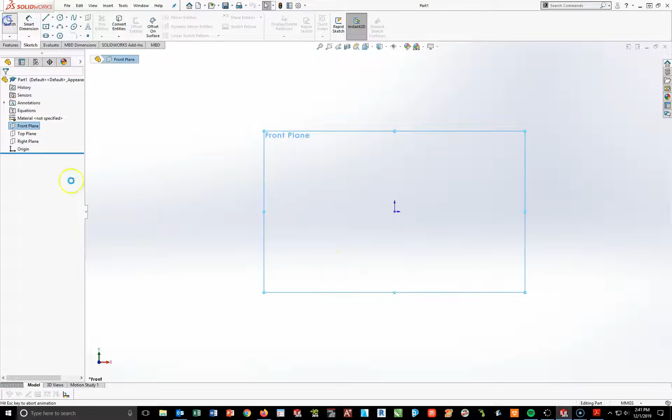So turning on my front plane and turning on my sketch tools, I'm simply going to turn on my line tool and create a U shape. Starting at the origin, I'll move out to my right, move straight up, move straight in, down, over, up, over, and down.

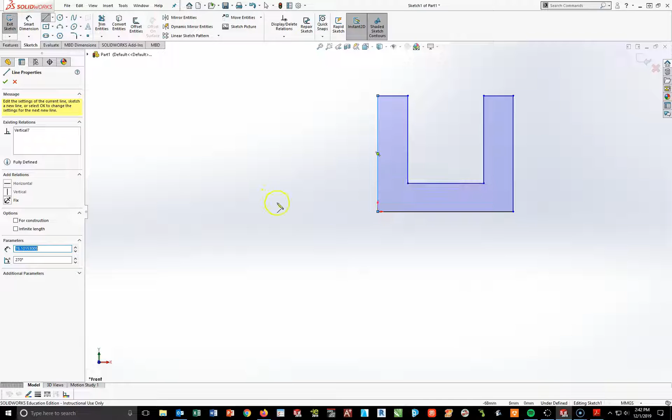Now, at this point, I'm done with my line tool, so I'll hit escape and hit my F key to center the part up. Now I see that it's in blue, so that means I need to look at my drawing to figure out the dimensions I need.

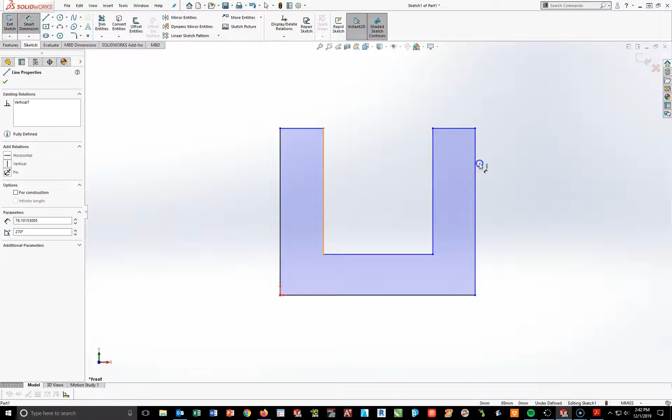So it looks like I need to make this thing 100 wide, a 60 gap, and each one of these sides is 20. So going back over, I'm going to turn this on from left to right at 100, make this distance right here 20, and the distance between these two sides here will be 60.

Now that takes care of the width part. Now I need to think about the height. Going back to this, I see the thickness down here is 20, and the overall height of this is 100.

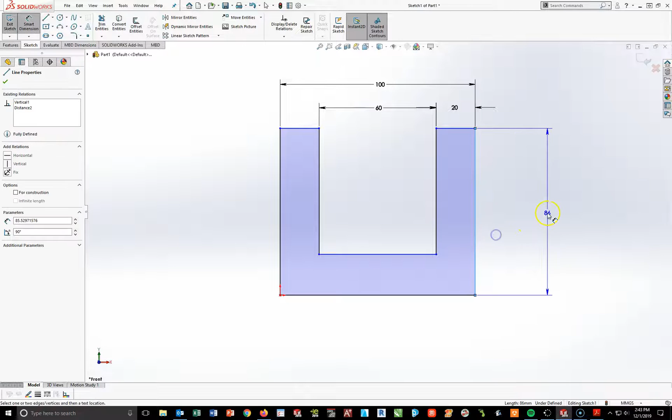So I'm going to go ahead and click on the side. I get the side as 100, and I'm going to get this distance down here as 20.

Now, as you can see, most of it's black, but this side right here, I see a blue line. And the reason that's happening, and hopefully you would see that, is that this line over here is not the same length as this one over here.

Well, I'm going to use my relationship tool, or my control key, to click on the left-hand side and click on this right-hand side and make these two lines equal. I will hit my check mark, and I now see that these are fully defined because they're all black, and it says fully defined here in the corner.

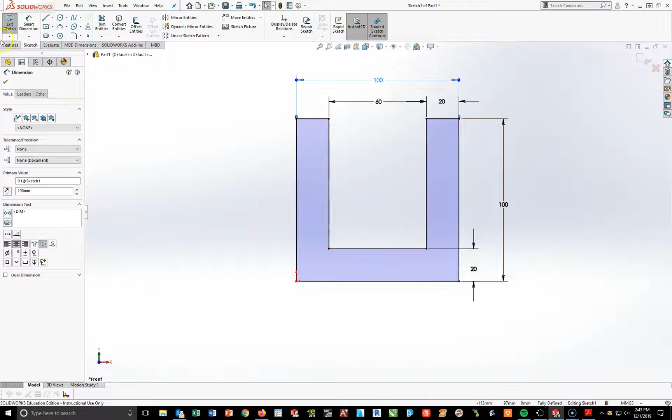So at this point, what I'm going to do is go to my feature toolbar, and we're going to do an extrusion.

Now for this one, that means I'm going to extrude in this direction. I basically have drawn back here, I'm extruding this way, and I'm going to extrude a total distance of 100. That is the depth I see right here.

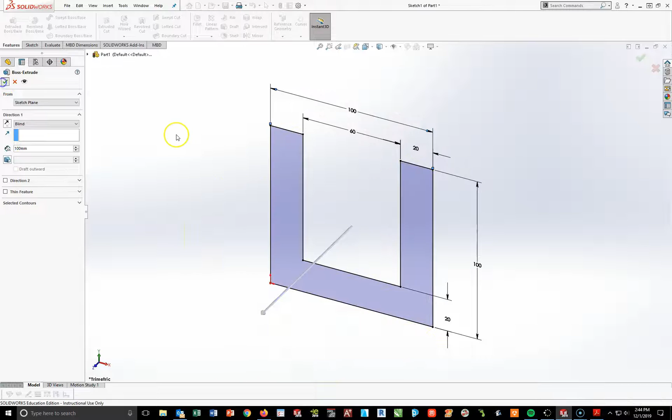So going back to SOLIDWORKS, where it says 10 millimeters, I'm going to change this to 100 and hit enter. Hit my check mark, hit my F key to center it up.

Now as you can see, the part is blue, and that should be a dead giveaway that there is no material attached to this part. So going back over here to my PDF file, I'm looking to see what the material is, and according to the PDF file, it is an AISI 1020 steel.

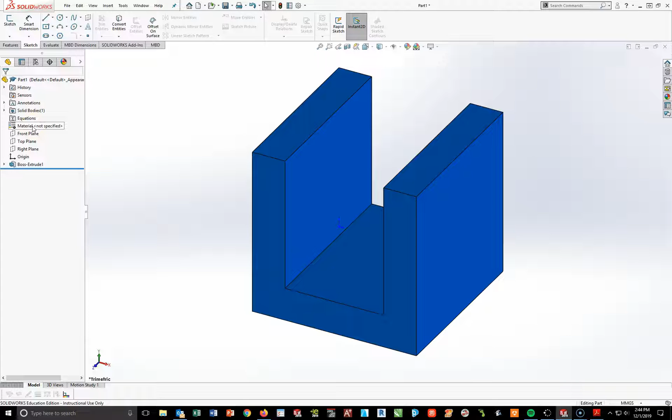Back at SOLIDWORKS, material not specified in the design tree, I right click and do an edit material. Under my steels, I'm looking for an AISI 1020. Don't worry about the cold roll, just go with a straight up AISI 1020. Hit apply and close.

Now going back to my part, I'm going to go ahead and add in these chamfers. I did not draw those in - that is a bad habit to do. If you try to draw them in, a lot of times these are where the mistakes occur. So what I'd rather do is keep this square and then use my feature chamfer tool to create these 10 by 45 chamfers.

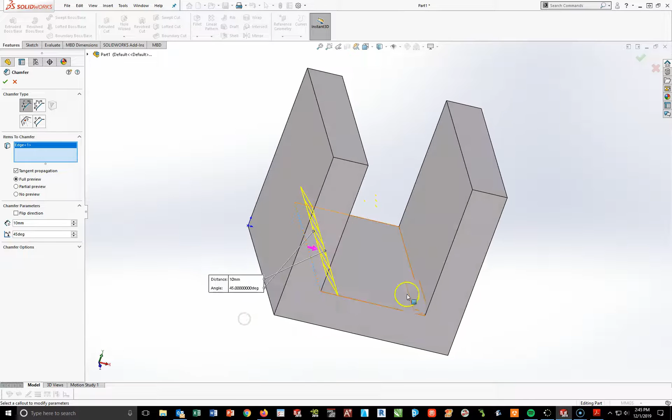Going back into SOLIDWORKS, I'm going to go to my features toolbar, and under the word fillet, drop that arrow down and go to chamfer. Now the default is 10 by 45, which is exactly what I need. So to make this work, I'm going to make sure I have my full preview on. I'm going to click on this line right here, hold my middle mouse button down and rotate, and click on this line right here. What I'm seeing is the preview of the two chamfers that are about to fill in. To make this work, I just go to the green check mark and left click.

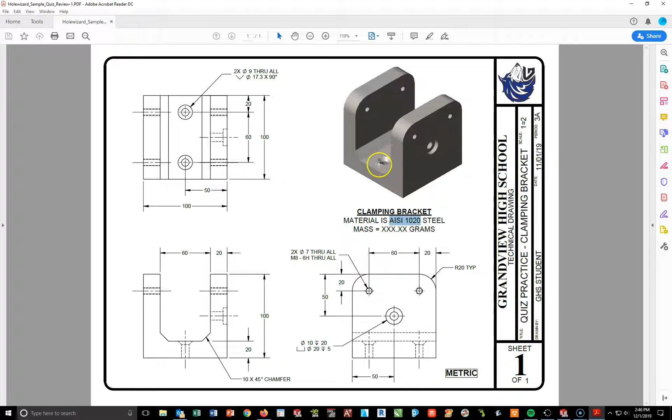Spacebar, isometric view - so there are my two chamfers. This is the most correct way and the best way of putting chamfers onto a part. So now looking back here, I see that I have these two pieces done. So now what I want to do is put in these two countersink screw holes.

The reason I know they're countersink is I see the sides are angled in, indicating a screw would fit in there. So now I'm going to have to use my hole wizard to put these in. Going back into SOLIDWORKS, under my feature toolbar, I'm going to go to my hole wizard. I left click and turn it on, and now I have my choices in my property management bar to set all this up. The three we primarily work with are Counterbore, Countersink, and tapped hole.

I would like to go to a countersink - that is this one right here. Now the big thing with doing this is the first thing I need to make sure is up to date is the standard. If you recall, we're drawing this part in metric. Right now mine's saying inch, which is not correct - I cannot cross my units. So I need to drop this down to an ANSI metric. It will be a flathead screw, I'm going to leave that alone.

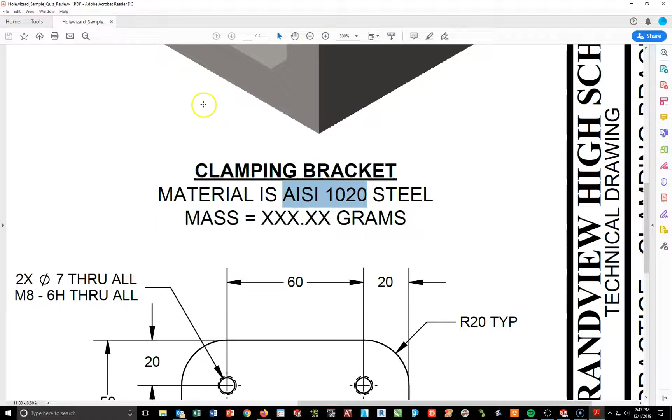But now I need to go back and look at this note over here. The note tells me I have two of these holes with a diameter of 9 that is going through all, with a diameter of 17.3 for the countersink at 90 degrees. So what I'm going to do is take these three numbers, the 9, the 17.3, and the 90, and plug them into my hole wizard using the custom properties.

Going back into SOLIDWORKS, I will go to Show Custom Sizing, click it on. I will now change this - the first box will be a 9, goes right in order. The second box will be a 17.3. The third box should be 90. Now the big thing is to make sure you have nothing else checked in the options area. The end condition should be through all, and the way I know that is because it says right here, through all. So now, knowing that's done, I need to place my circles or my holes.

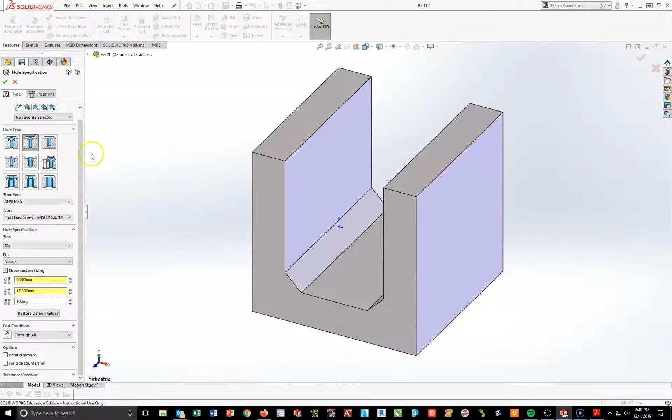So I go to the Positions tab here. I'm going to click on this surface - it says select the face for the hole. I'm going to select that face right there, do a spacebar and a normal to. I'm going to drop 2 of these approximately in the middle, left click on number 1, left click number 2. Now you'll notice the tool is still active, so to deactivate it, hit escape.

Now don't hit your green check mark - these two things are not defined. I can see that this is blue and so is this, and it also says down here under defined. That means I need to actually put these in position using my dimension tools.

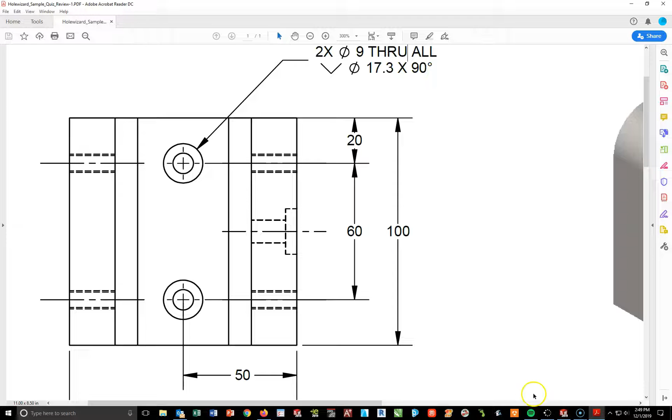So I'm going to look here. I see from the back edge to the center here will be 20. The center to center distance will be 60. It'll be 50 from this outside edge right here. So if I add those three numbers in, I should be able to get this to fully define.

Turning on my smart dimension, from this point here to the back edge will be 20. From the center of this upper hole to the center of the lower hole will be 60. And from this center to the far right, pulling down, will make this 50.

Now this one here, in this case, they're not defined yet for a specific reason. We need to add in a relationship between these two circles of vertical. So I did that by holding my control key. By doing that, it now says fully defined, and I notice the asterisks have both turned black.

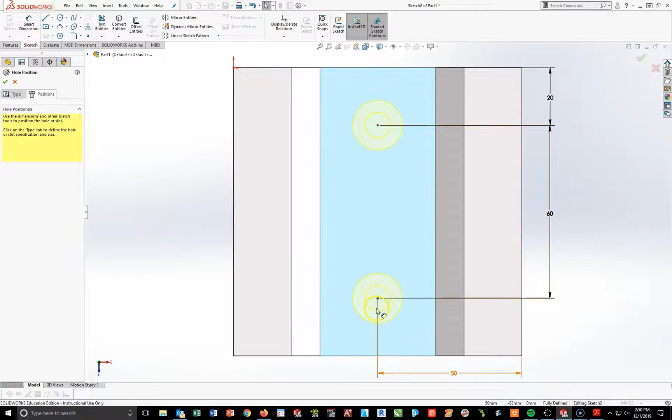As soon as I see this is fully defined in black, I hit my check mark, spacebar isometric, and I have my two holes where they're supposed to be.

So looking back over this view right here, I've completed these. I'm going to go ahead and enter this one right here. This is a counterbore. A counterbore has a flat bottom to it when it's sunk in.

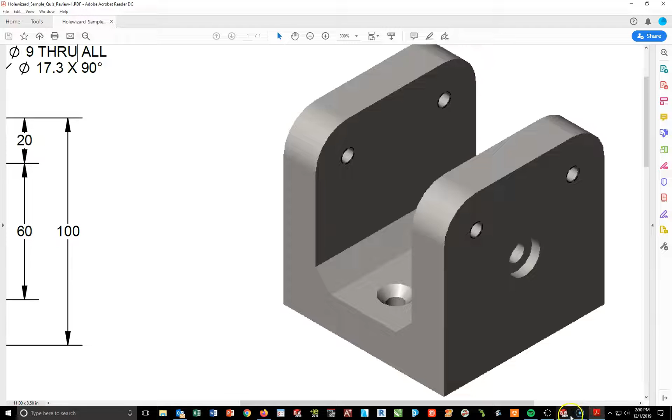So I'm going to go back and turn on my counterbore tool, hole wizard, and add this on this right-hand side. Now this only is on this side. How do I know that? Because I can look up here on this view and I see it only on this side.

Now looking at this again, it looks like the view I need to work with here is going to be the right side view. This is the information I need to complete this part.

So I'm going to go back into SOLIDWORKS, go back to features, and turn on my hole wizard again. Now we just did countersink. This time though, I'm going to use Counterbore.

I'm going to left click on that and it's going to ask me if I want to keep my custom sizing from before. In this case, no, I don't want to, because all the numbers are different. So I'm going to say reset the custom sizing values to their default values so that everything gets set back up.

Okay, now again, make sure it says ANSI metric under your standard. All right, the custom sizing - what I'm going to do here is go through and add in the numbers we saw in that note. That is these right here.

So I'm going to add in a 10, a 20, and a 5. Going back into SOLIDWORKS, I'm going to put in the first box a 10, the second box a 20, the third box will be 5.

Now the end condition, this is important. If I hit through all, you've got to think about that. If I put it on the side over here to the right and do a through all, it's going to not only punch through this wall, but also punch through this wall over here. So instead of through all, I'm going to drop this down to up to next. What it'll do is go to this edge over here and stop.

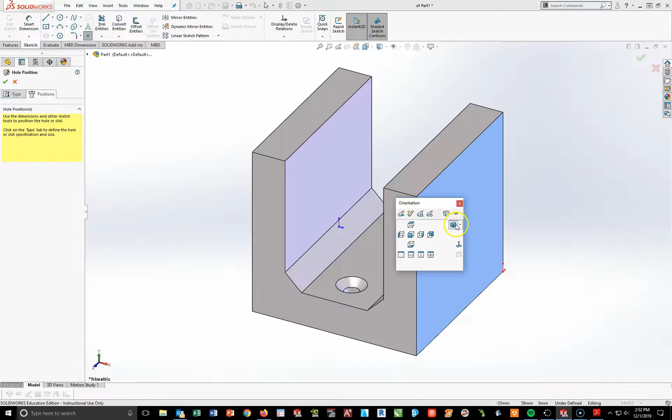Now I have everything defined, so the next step is to position the hole where I need it. I click on the Positions tab and it says select the face for the hole. I'm going to select this right side face, do a spacebar and a normal to, and kind of eyeball it to this upper middle and left click.

Now you'll notice it's still active. To deactivate, I must hit escape. Now in order to get this defined, because right now I see that as blue, I also see under defined in the corner. I need to position this hole using my dimension tool.

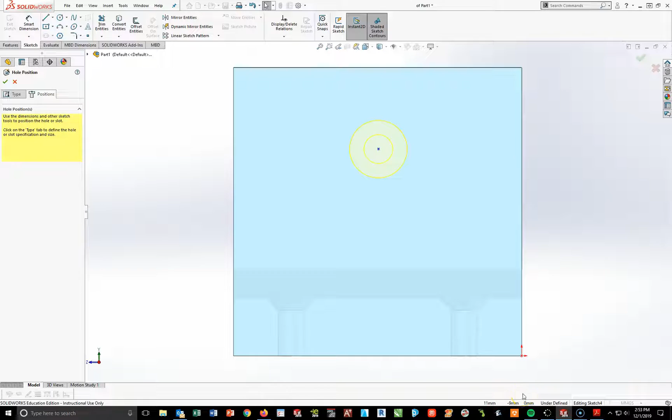So going back to the part, I'm looking, it looks like this is going to be dimension 50 in and 50 down. Going back to SOLIDWORKS, turning on my smart dimension from this top here will be 50. And from here to the side is going to be 50.

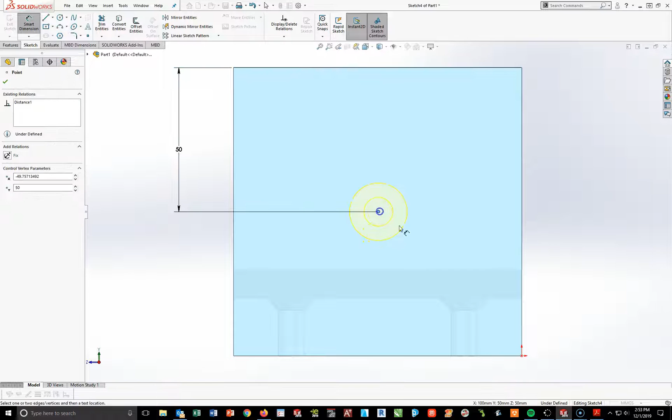Just like that, I notice this turns black and it says fully defined on the side. Once I see that, all I have to do is hit my check mark, spacebar, isometric, and there is your counterbore hole.

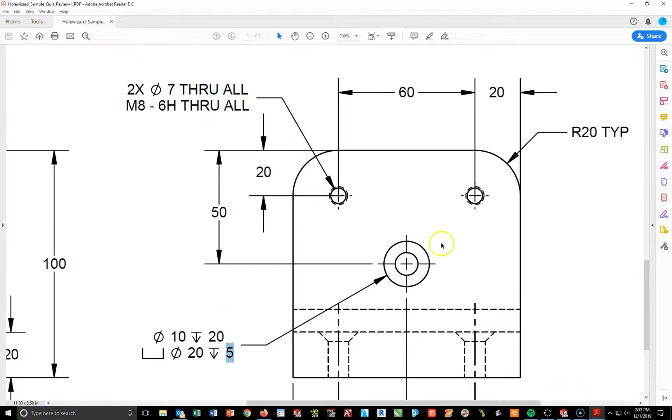Now let's go back and look at this part. One of the things I've just noticed is I forgot to round off my corners. You'll notice that it says the corners should be rounded off at an R20, and TYP means all the corners are the same. So I'm going to use my feature fillet tool.

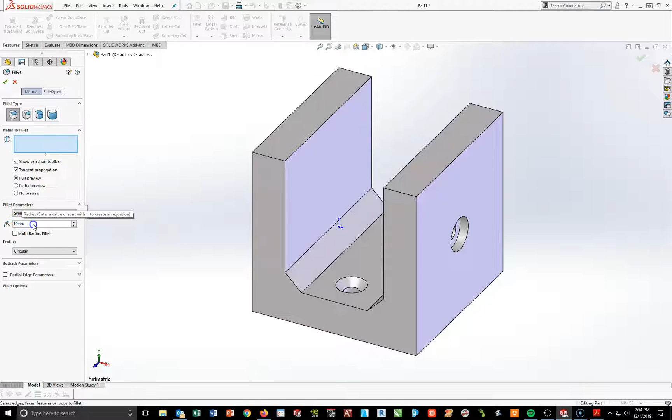Under my feature toolbar, I'm going to go up to my fillet tool and put in a radius of 20 millimeters. Now with a full preview showing, I'm going to click on each of these lines here to create the 20 millimeter curve. As soon as you see all 4 of those showing round it over, hit your check mark to finish that step.

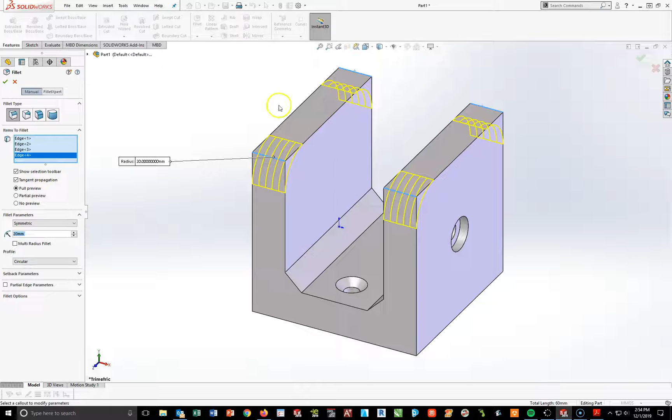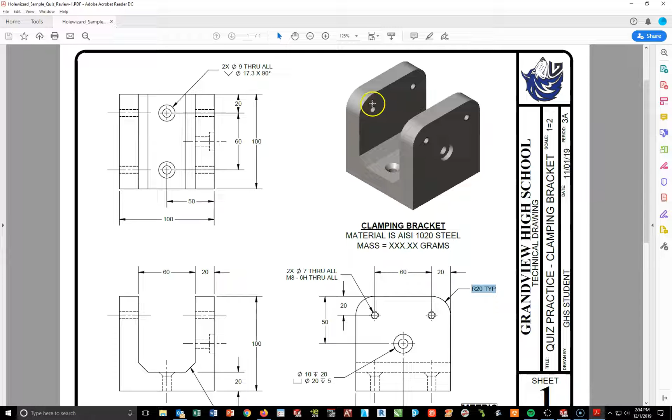So now, looking back at my part, I've got all of my stuff done here. I've got all these rounded over, I've got my counterbore and I've got my countersinks, and I've got my chamfers. The only thing missing are the screw holes going through the two sides.

So looking at this corner here, I'm going to focus on this note right here. What it tells me, I have two holes with a diameter 7 going all the way through, and the size of the hole is an M8-6H through all. So I'm going to use my hole wizard. In this case, what I'm looking at is these dashed lines going around the outside edge of the circle. That indicates a screw thread. However, we don't call it a screw thread when working with SOLIDWORKS, we call it a tap, or a tapped hole.

Okay, tapped thread hole. So I'm going to go here to SOLIDWORKS, go to my features toolbar, and we're going to go back to hole wizard. Now again, I've used Counterbore and I've used countersink. This time though, I want to get a screw thread in there, or what we call a tapped hole.

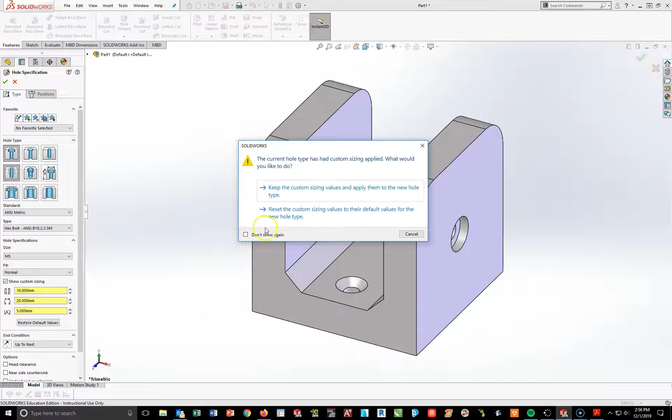Well, if you look at the first row and the first box in the second row, there is your straight tapped holes. If you left click on there, it's going to ask you if you want to reset your values. Since my values for this hole are different than my previous hole, I'm going to go ahead and say yes, reset the custom sizing. Now again, making sure I'm under ANSI metric.

I am, that's good. This will be just a straight tapped hole, so I'm going to go down here to tapped hole. I'm going to change this to an M8, and now this is one where it's a little bit off there, I'm just going to do an M8 by 1.0. Custom sizing will be 7.00, with condition being through all.

Okay, now again, under options, make sure all boxes are unchecked. In addition, this is very important, in order to see these dashed lines going around a circle, you must have this box checked under options: cosmetic thread is showing.

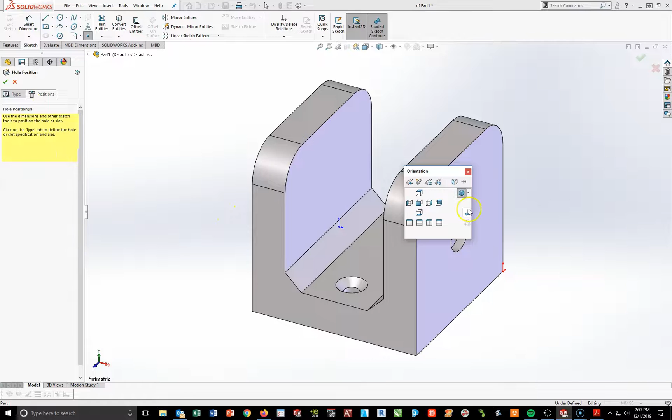Now with that done, everything's set up, I can go to my positions tab, click on this face, spacebar, normal to, and I'm going to place a hole over here and a hole over here. I'll hit escape to turn my tool off. Now again, neither one of these is defined and they're not in the correct place.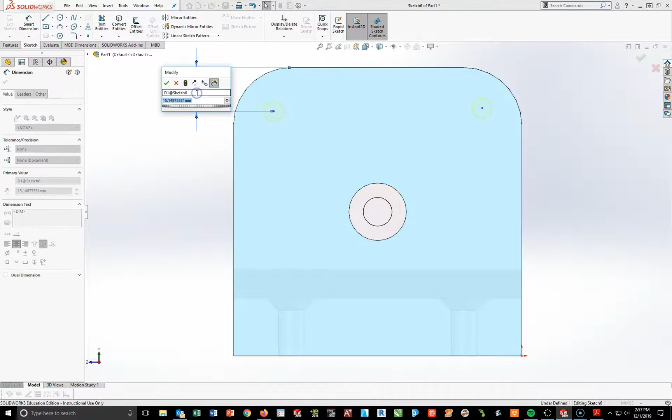We must dimension them to their proper spot. So going back to my drawing here, it looks like it's going to be 20 down, 60 in between, and 20 from this right edge here. In addition, they're going to be horizontal to each other. So turning on my smart dimension, from here to this part here is 20. From this left one to this right one will be 60. From this right one to this edge here will be 20.

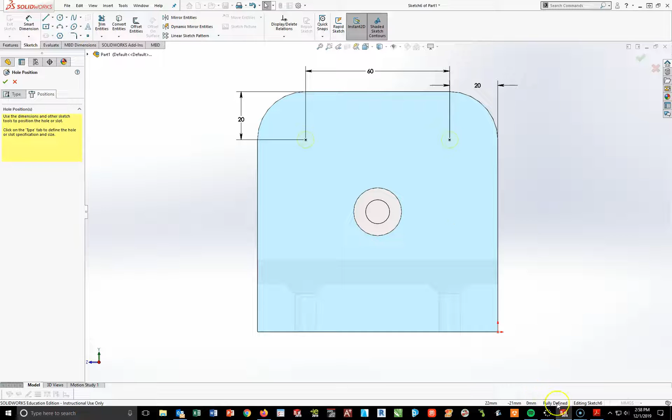And then the last thing is that they are both horizontal to each other. So with my control key, I will hit both centers and make them horizontal. I now see fully defined in my lower corner. So at this point, I can hit my check mark. I see the dashed lines indicating threads. Go to my isometric view, and my part is done.

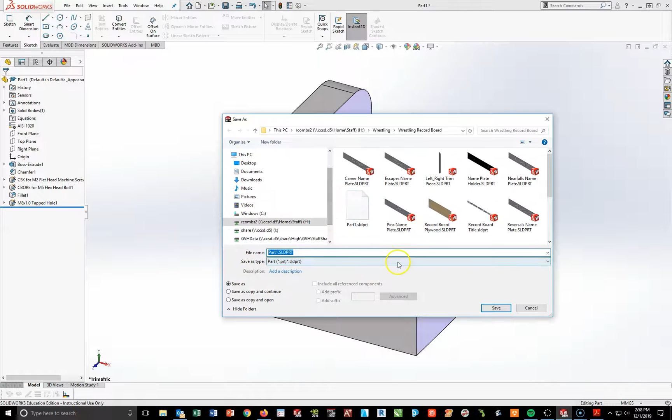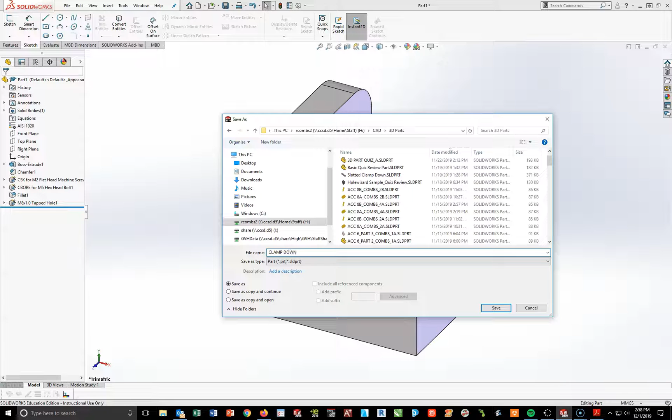So at this point, I'm just going to do a file save as. Go ahead, in this case, to your H drive, under your CAD folder, 3D parts folder, and call this—whatever we call this—clamp down, I believe is what I called this, if I remember correctly. Yeah, I'm just going to call this clamp down, caps lock, and underscore your last name. Okay, and save. All right.

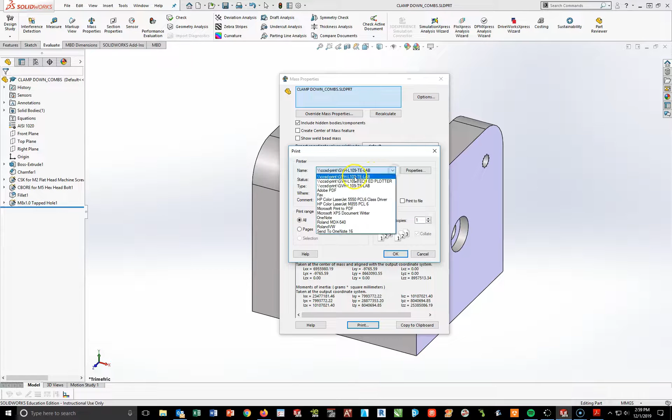At this point, I can go into my evaluate, I can look at my mass properties. I see my mass properties are 4,061.58 grams. So now go ahead and print that. Make sure you get it printed to the correct printer. In this case, it should be our L109TE lab, and say OK. Close out your mass properties.

So our last step then is to put this into a drawing. Okay, so again, I'm going to do a file new, and we're going to put this into a GHSA metric. I'm going to hit OK.

As the drawing opens up, I'm going to hit my F key to center it. And I'm going to come over here where I see the clamp down, go to the blue arrow, and start setting up my drawing.

Now, this is the same setup we've been doing since week number 4 in school, so we've been doing this for almost 14 weeks now. I'm going to start by going to the front view first, turn on my preview, and make sure my hidden lines are visible.

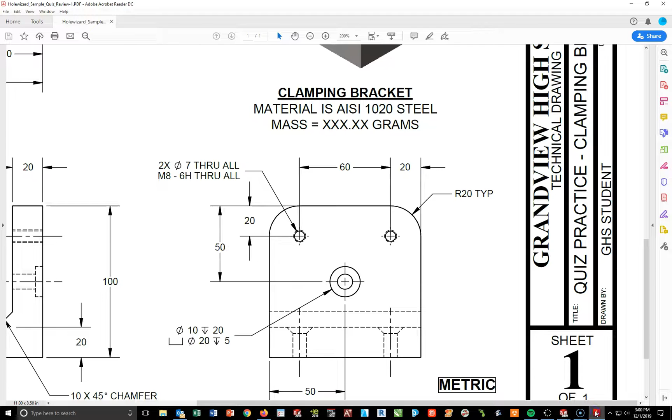The scale for this one, I believe, is supposed to be... let me go back to the part drawing. It's going to be 1 to 2. So going back to SOLIDWORKS, setting that up, this one here I should see 1 to 2, and I do.

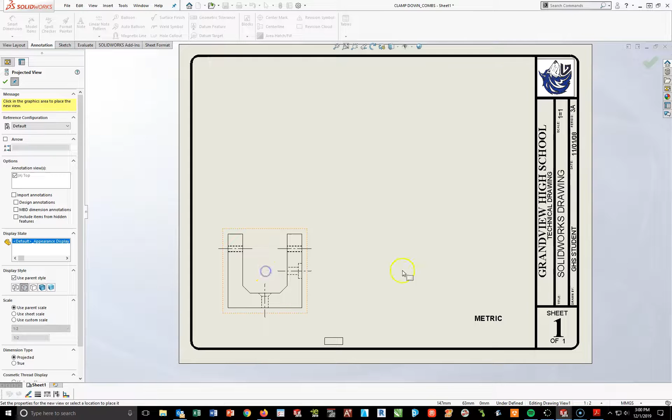At this point, all I'm going to do is come in here, starting in the left-hand corner, left click, pull to my right, left click, pull straight up, left click, pull a diagonal, left click. Okay, I'm going to highlight this box and get rid of it because I don't want it there.

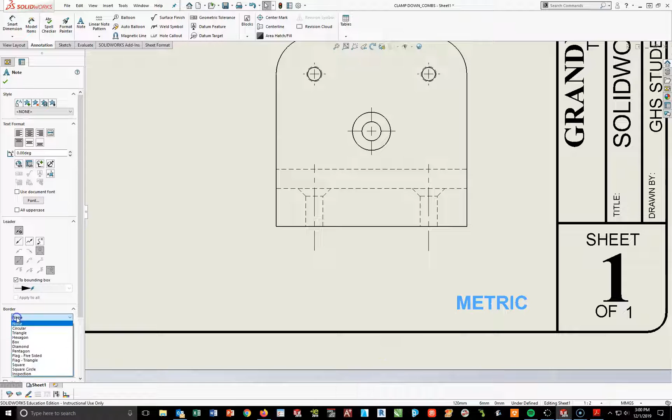I'm going to take the metric box and move it to this lower right corner, like so. I'm going to go ahead and add in the border over here to the left and make a box around it.

Now I'm going to take this upper one here, and the first thing I want to do is add some color. If you want to take it without the black lines, you're more than welcome to go this way. I want to really focus in and make sure I don't have any of these lines on this part, so I'm going to delete those.

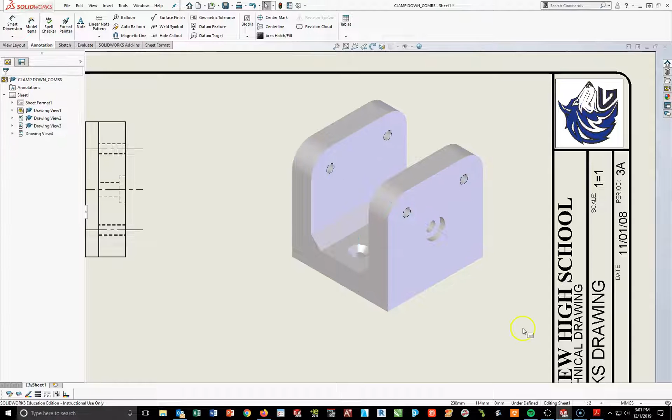I'm also going to go ahead and add in my note here. Now I'm going to use the trick on this one to save myself some time, so I'm going to go to my note tool and drop my note tool underneath.

I'm going to go over here to my PDF file, and highlight this title right here, Control Copy, come back into SOLIDWORKS, and with my cursor inside this box, do a Control V.

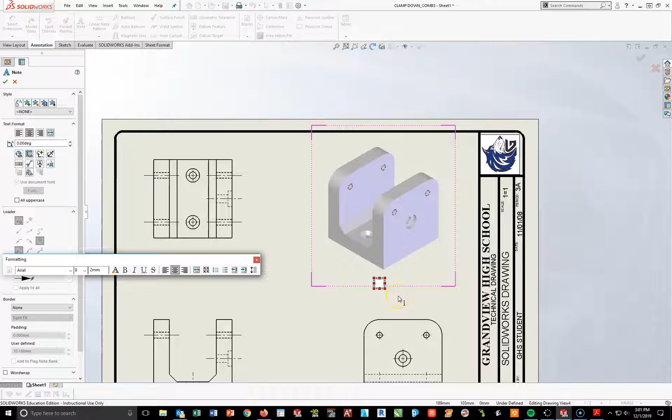In this case, though, I need to put in a number here. So I'm going to put in 4061.80 grams. Do not leave it as three X's like some of you have been doing—it's an automatic deduction in points for not telling me your mass.

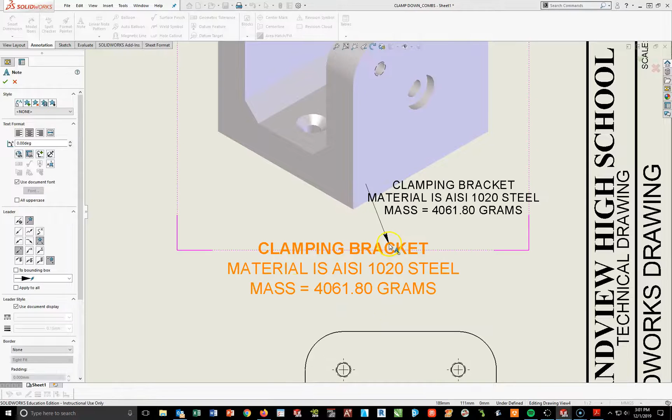As soon as you're done, click outside, hit escape, and make any adjustments you need to put this in relation to this part right here. Okay, that looks good—everything looks done to this point.

Now, since we're getting ready for a quiz, the next step I want to show you is how I can get my dimensions on this part as fast as possible. I am now going to go up to the word Model Items, left click on that, and I just got to quickly set some things up.

So I'm going to say the entire model and import items into all views. I'm also going to make sure that not only do I have my dimensions for drawing, I'm going to do the not marked—basically clicking on every single one of these boxes.

Nope, I don't want the profiles. Okay, like so—so I want 1, 2, 3, 4, 5, and 6 drawings, and I want the eliminate duplicates on.

At this point, all I'm going to do is left click on the green arrow, and what you're going to see is all the hole callouts and all the dimensions will suddenly pop on the screen. So there are all my numbers.

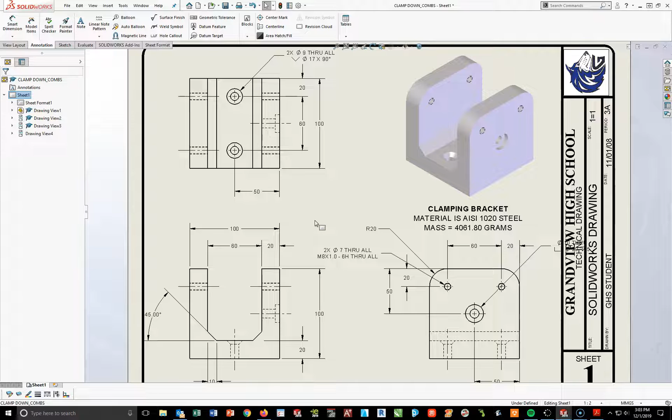Now, what's important with this is if you were to do all the two-dimensional sketching we did before extrusions and put your dimensions in the same spots as you saw in the drawing, they should have imported into the same spots. Now, looking at this, I got a couple issues.

I'm going to just make some adjustments, kind of come in here and tighten this up. This 100 was actually on the upper part here, so I'm going to turn my Smart Dimension on and add that onto here. Okay, the 20s are good.

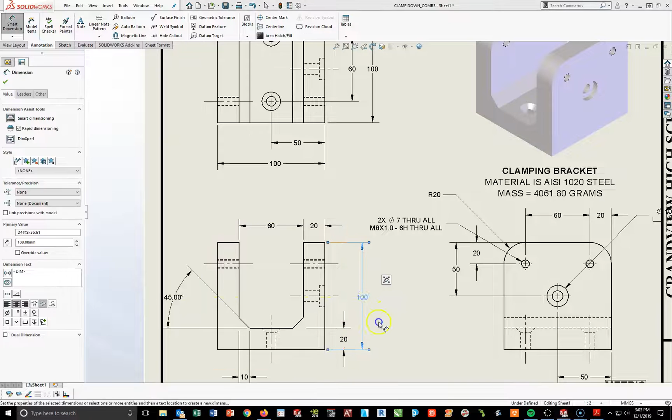This 100 I'll bring it a little bit tighter. That looks good. But this 10 and this 45 must be deleted—we'll add a note on there in just a second.

Okay, the 60, the 20, and everything else, this all looks good. The only thing I notice here is that in our drawing that I gave you, this is 17.3.

Well, to change this, I need to go over to this callout value. If you look, there's 3 boxes here. If you drop this arrow down, you'll see each of the pieces of that note in this box. Here's my 9, there's the word through all, there's my 17, and there's my 90.

Well, I want to go to this 17 and left click. And then where it says none document, drop that to a 0.1. And now you'll notice the 17 went to 17.3. Hit the green check mark.

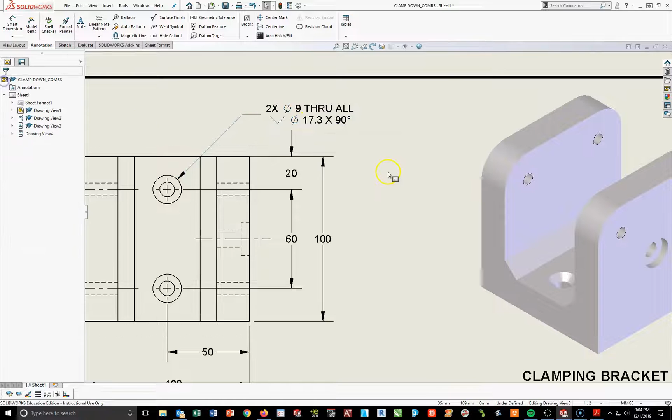Now looking at my drawing, this view is completely done. This view is completely done except for this note. So what I'm going to do is go back to SOLIDWORKS here, go back into my drawing, and I'm going to turn on my note tool, click on this line, pull down below, and left click again.

Now coming over here to leader, I'm going to go to this middle box, third row, so I can get a bent leader, and then begin typing in here. Do not change your font size, but just make sure you have cap locks on. It's going to be 10 space X space 45.

Now, to add your degree symbol, we do not type in the word degrees. We don't type in DEG for short. We don't put an asterisk symbol. We actually put a degree symbol.

And to do that, if you look up here to your left next to the anchor under text format, there is an add symbol button. If you left click on it, your degree button is the second one in. It's the only way I will accept this. Otherwise, it'll be marked wrong on the quiz.

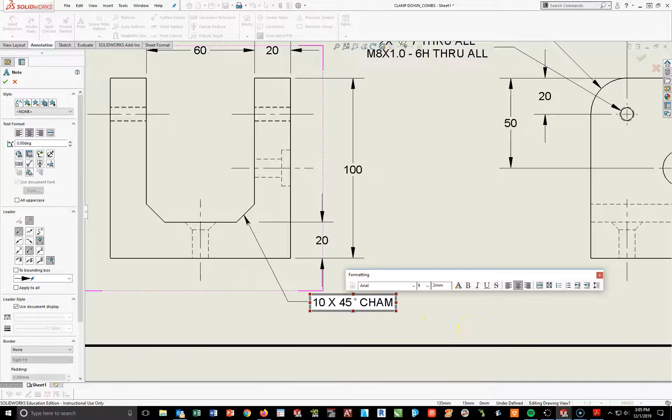I'm going to do a space bar and chamfer. Click outside and adjust as you need to. So this view is now complete.

Okay, the 20 is the same thickness, we'll just leave that alone. So that takes care of itself. Okay, this one we'll keep right there.

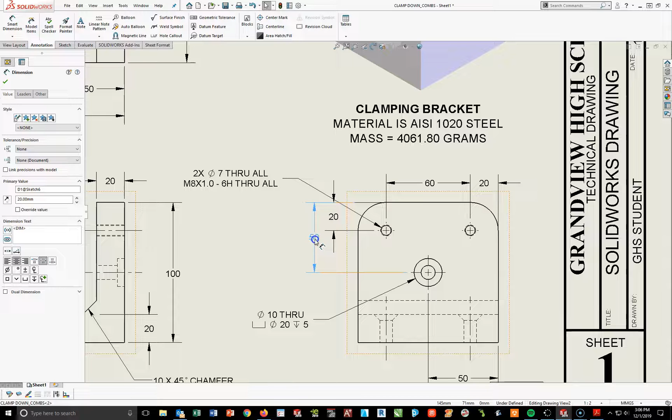The radius 20, though, I'm going to delete. Keep the 20 here and the 60 here. That looks good, this 20 looks good. This 50 looks good, I'm going to move this up a little bit. This 50, slide up a little bit.

And then last but not least, I'm just going to go ahead and add one more thing on here, which is my R20, and I'm going to add in the TYP next to it. Now, in this case here, I'm going to slide this over a little bit. I've got some space to work with, so I can bring my TYP up.

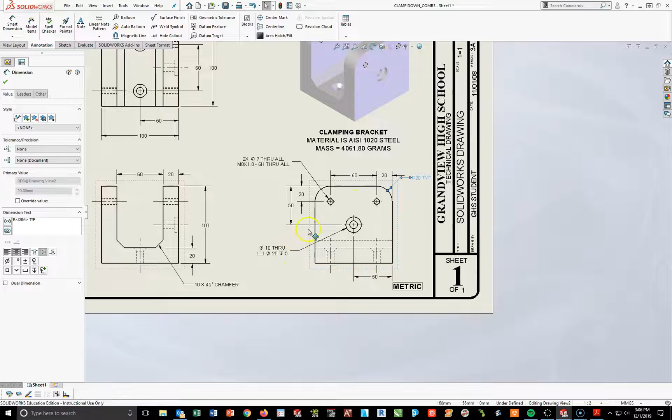And actually, in this case, I'll leave it like that. That looks good.

All right, so at this point, I have all of my information, all of my views are done. I'm just going to do a quick double check. I see a 20 TYP, there's notes there, 50, we look good. My final drawing is almost done.

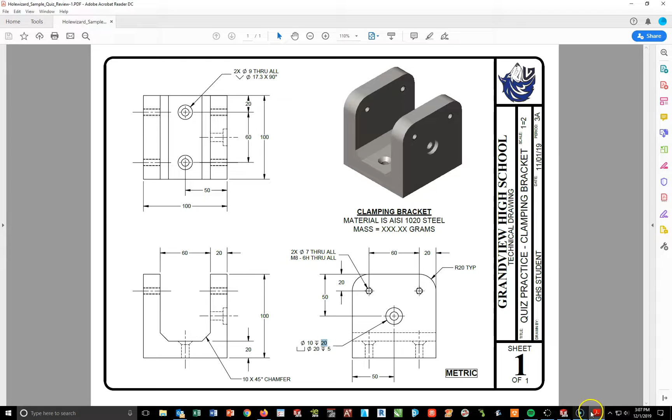The only other thing I have to do is change up my title block and then print and turn this in. So the title for today will be quiz practice clamping bracket. So double click, quiz practice, space dash space, clamping bracket.

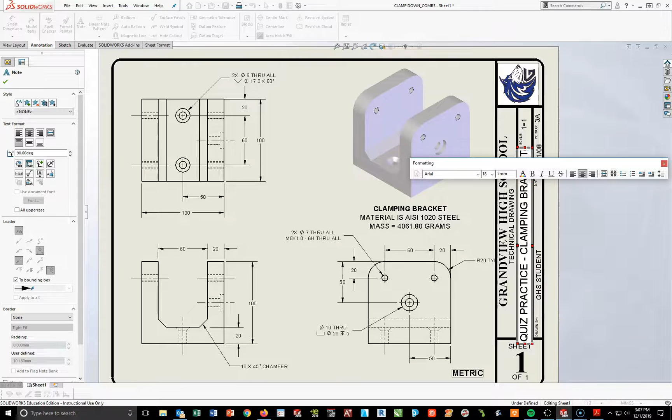Now, if I have to adjust my font size, which it looks like I do, I'm going to go from 18 down to a 16. And now it fits in the title block.

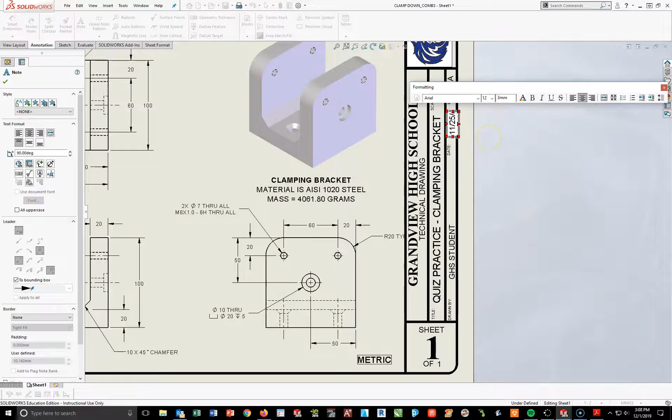Scale 1 to 2. Period 4A. Date. And then you're going to put your first initial and your last name.

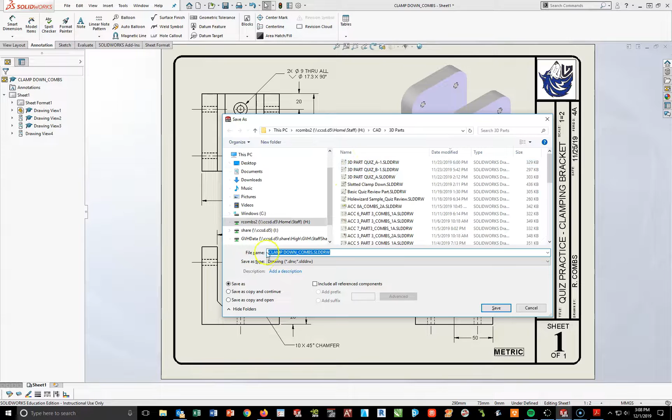At this point, you are now done with this drawing. So make sure you do a control save. Save it to the same spot you have your part. Just go ahead and keep the same name and hit save.

Your last step then is to do a file print. I'm just going to hit the print button at the top of my screen. Make sure I'm printing to the correct printer and hit OK.

Go ahead and collect your mass property sheet, staple it to the upper left-hand corner, that's up here, upper left-hand corner to the back of the paper, and then place this in the collection box when you are done.

At this point, this is a done problem. Go ahead and begin working on the next problem in tomorrow's class. Good luck, if you have any questions, don't hesitate to ask.